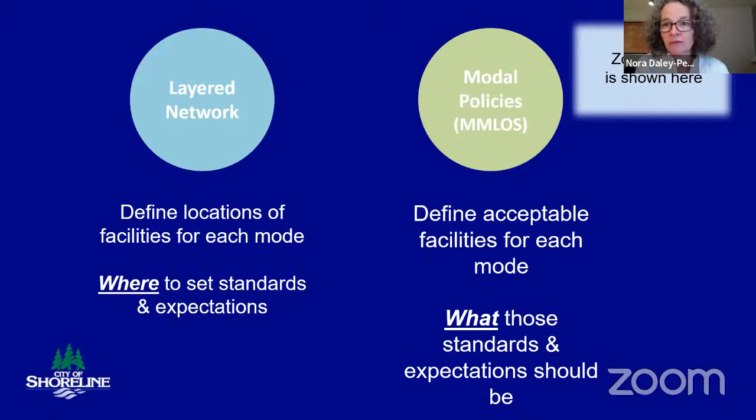Diving a little bit deeper, what are we considering for each one of those modes? For the pedestrian mode, we are really relying on the good work that was done in 2018 with the existing sidewalk prioritization plan, as well as looking at land use context and street classifications. For bikes, we are using the state of the practice, which considers providing a comfortable, low-stress environment tailored for serving people of all ages and abilities.

For transit, we are thinking about how we can coordinate—not just thinking, but we are doing the coordination—with our transit agencies to advocate for service for our community's needs, as well as stop amenities that make riding convenient and comfortable.

You'll hear me use this word shared use mobility, and I will be coming back to the commission in April to talk more about that mode, but a little bit of a teaser. Most of you might be aware of the work we did with the Evans School, because I touched on that during my November presentation to the Planning Commission. We were fortunate to hire the UW Evans School to look at a concept called mobility hubs, essentially places that can be launch pads for transportation options to complete short trips around the city, like e-bikes, e-scooters, Car2Go, etc. And finally, auto and freight. This is really the focus of tonight's discussion.

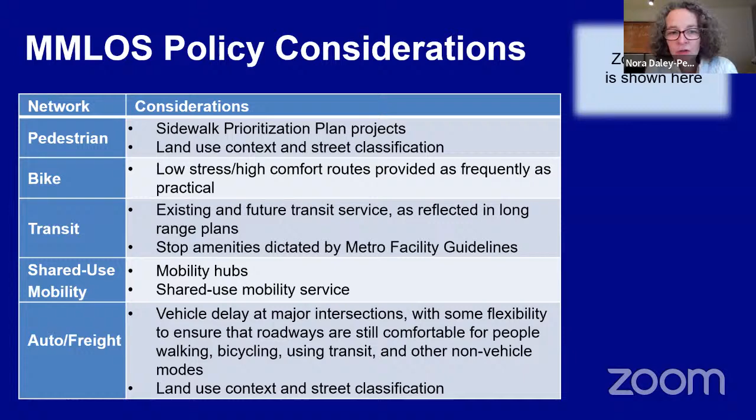The city's existing policy considers mainly delay at arterial intersections. And we're going to be discussing whether our current policies meet our needs or should they be adjusted to be more context sensitive. And with that, I am going to pass over this presentation to Kendra Dedinsky.

Kendra Dedinsky, City Traffic Engineer, and I haven't had the pleasure of meeting all of you yet, so good to be here and meet you all, at least virtually. I'm going to really dive into a lot of technical details tonight. If I accidentally use an acronym without defining it, please catch me on that, and if anything needs clarification along the way, please let me know, because this is some pretty technical and in-depth information. We'll pause at a midway point for potential questions and clarifications. But with no further ado, we will jump in now to this topic.

So what is level of service? Shoreline currently measures performance of intersections using a standard methodology known as traffic level of service. This is used by jurisdictions all over the country, and level of service represents the average delay per vehicle during the peak hour at a controlled intersection. Individual LOS grades are assigned on a letter scale A through F, with LOS A representing free flow conditions with no delay, and LOS F representing highly congested conditions with long delays. You can see the delays in the table associated with those letter grades.

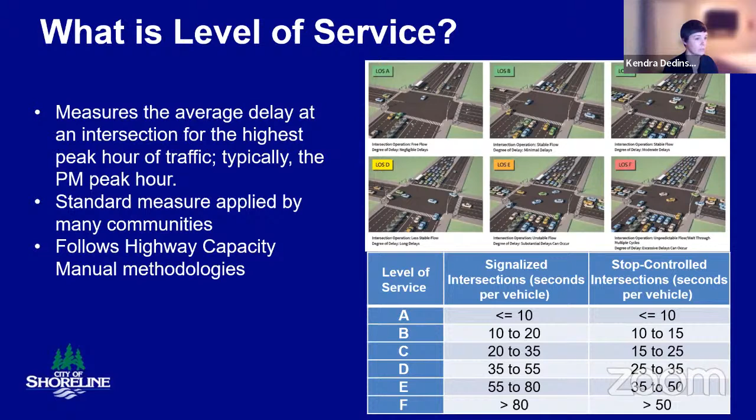So the city's current level of service policy requires level of service D at signalized intersections on arterials and at most unsignalized intersecting arterials, with the exception of state routes, which have a level of service standard of E. We talked about intersection level of service, but we're also introducing our supplemental volume to capacity standard, which simply takes the measured or anticipated volume of the roadway and divides it by the theoretical capacity. We'll get into more detail on that later. The capacity is typically established by regional models.

Can you go back to the last slide? Sorry, Nora. Let's see here.

Another concept I wanted to introduce before we jump into the host of options we're considering is growth projects and transportation impact fees. We're not going to talk a lot about that today, but I wanted to note that level of service standards directly correlate to transportation impact fees paid by development, or in some cases by the city, where we exempt development from paying them. Any location not meeting our level of service standard as we evaluate it today must be mitigated or exempted from the standard. So to mitigate, growth projects are planned, and the estimated cost of those projects is the basis for impact fees. Basically, the more projects there are, the higher the impact fee becomes. This is a fundamental principle to keep in mind as we talk through the various options and how it relates to how we grow as a city.

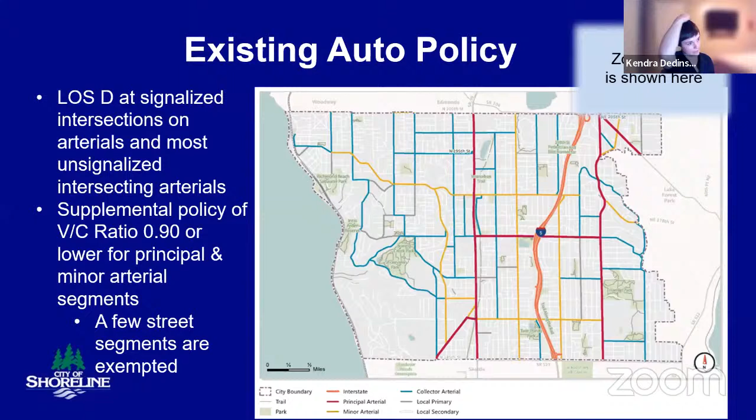Option 2A would allow for a level of service E adjacent to commercial or higher density zoning, but retains level of service D for everything else. Option 2B allows an LOS E in candidate countywide center areas, which are our 148th station area, our 185th station area, Shoreline Place, and Town Center, and that would similarly require LOS D everywhere else in all the residential areas and other miscellaneous pockets throughout the city.

The last option, option 3, which is a bit complex, so I'm happy to pause once we get there, proposes an average methodology - LOS E for intersections along particular corridors in our denser areas, and D for everywhere else. So that is averaging level of service across multiple intersections, a little bit different than the previous options we're describing, which apply to individual intersections.

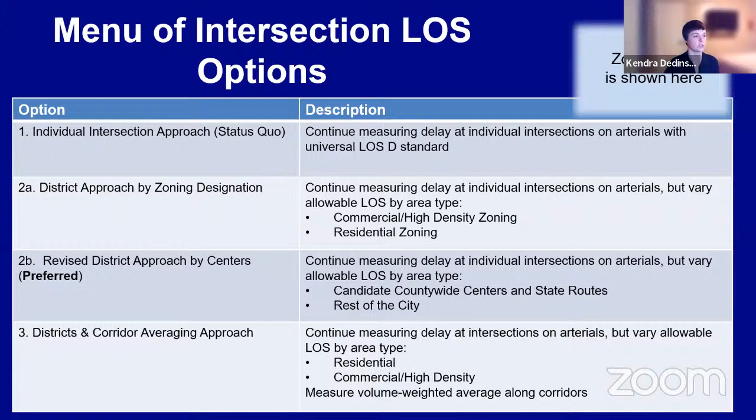Okay, so next slide. So jumping in, we're going to go through piece by piece through the four options, pros and cons, and then look at them together. This is really just evaluating a basic overview of our first option from a pro-con perspective, which is our status quo, our level of service D citywide at arterial intersections. And want to note too, keep this in mind also, that state routes are exempted from that to level of service E already.

The benefits of this option of staying the same are really its simplicity. It also upholds the least vehicle delay, so this would make sure that driving remains relatively convenient citywide. On the flip side, though, upholding this lower vehicle delay really does come at a cost, mainly to walkers and bikers, as wider roadways and intersections make for more exposed crossings and a less friendly walking and biking community, as well as just less available right of way to work with.

Another big concern with this option, and perhaps relating back to the impact fee, is this option would be the highest cost, both to the city and developers, for mitigation projects that are required to make sure the intersections function at this level of service. So the more projects required for this more conservative LOS policy, the higher the TIF ends up being. So those are the main benefits and trade-offs of staying the same.

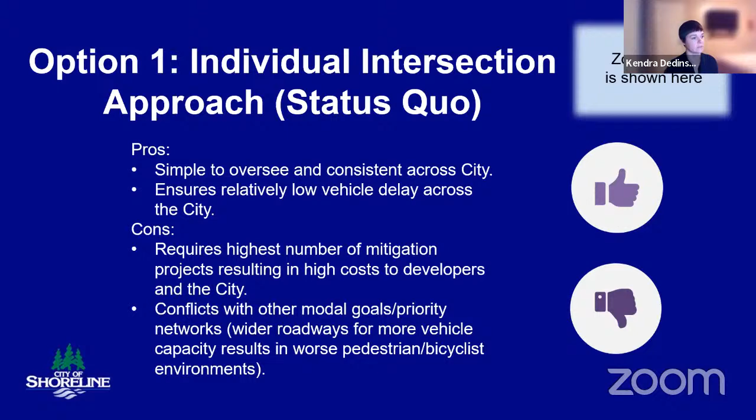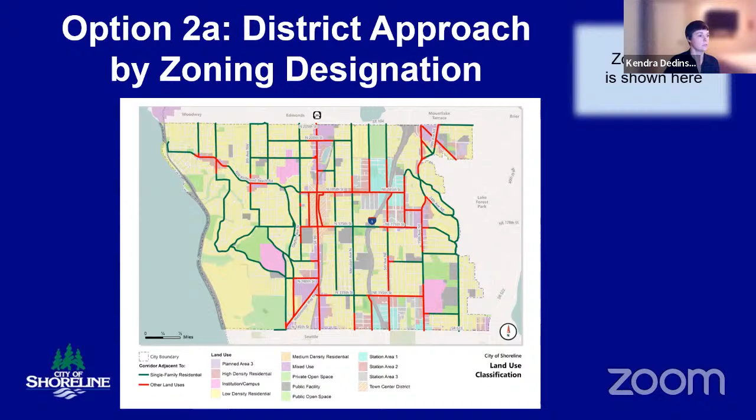Next slide. Okay, so looking at the pros and cons of this more context sensitive approach, we see it serves to better balance the modal priorities. So what I mean by that is we're not required under this option as much to expand roadways in areas where we're hoping to see more people on foot or bikes or scooters, that sort of thing. This option does still evaluate individual intersections, so it maintains simplicity in the same sense our current standard does, and notably, lower cost slightly than the status quo.

That said, with this option, you saw there's variation throughout the city. That can bring some edge issues that I'll mention on a couple other options too. What I mean by that is if we allow for a level of service E on one intersection that's adjacent to a residential area, you could expect that delay kind of trickling into that residential area too. So that's something we need to be cognizant of as we evaluate these options.

Additionally, with this option, there are little pockets of higher land use, right? Take Richmond Beach, down by the bowling alley, etc., that aren't necessarily as well supported with transportation options. They're not right next to light rail stations, maybe just one or two transit lines, not a complete sidewalk network. So it might feel more appropriate to maintain a LOSD in those fringe areas, not in our core area with more robust transportation options, as we'd expect them to remain somewhat vehicle dependent.

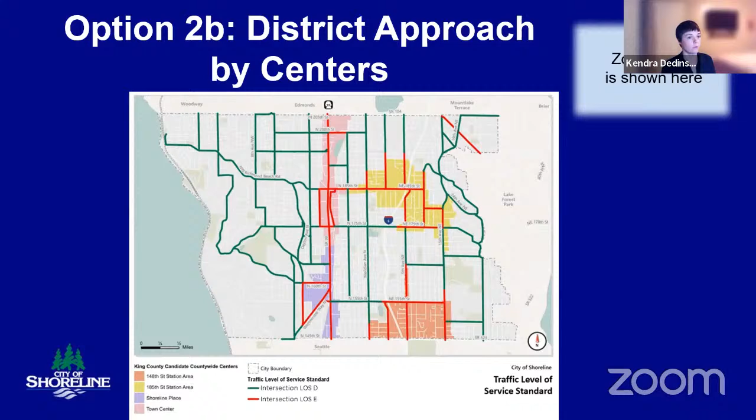All right, next slide. So this option has a lot of the same benefits as option 2A in terms of being slightly lower cost than status quo. It better balances mobility priorities with context sensitivity, and I'd argue even more context sensitivity than 2A, in that we're really focusing in on the center areas where we're expecting the most growth.

But it also better addresses some of the downsides. There are fewer edge issues, right? You'd expect fewer effects trickling out from the growth centers compared to the multiple locations that occur in the zoning designation option.

And the other thing we know is that our zoning can change. It's not something that happens frequently, but it could change over time in small areas, small pockets or parcels, which can pose a challenge for keeping the level of service standard consistent with zoning specifically. These centers are less likely to be a moving target, so anchoring our level of service to that makes sense from a consistency perspective as well.

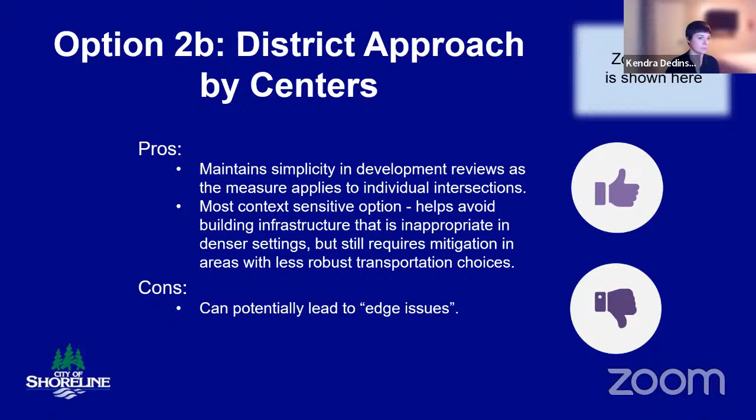All right, next slide. Getting to our last intersection option that we've evaluated: this is option 3. This really allows the greatest flexibility, and by that I mean it allows the highest amount of vehicle delay.

It groups some key corridors in our denser areas together, setting a standard of an E average. What this means is that one or two intersections along one of these grouped corridors might actually fail, have a very high level of delay, but if the weighted average of all of them taken together still produces a level of service E, then we consider it okay and don't need to mitigate at that point.

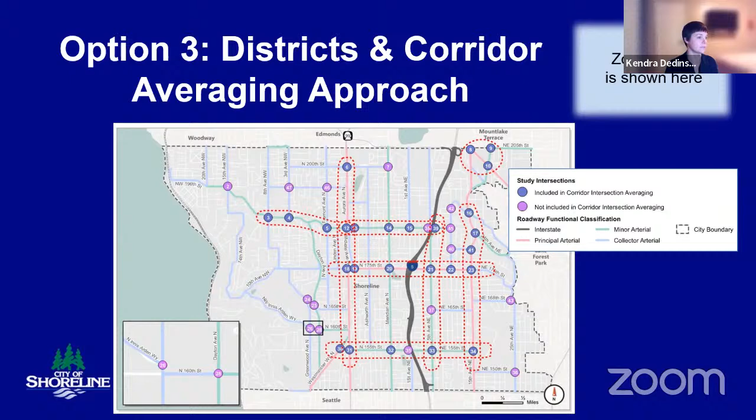So by using an average of multiple intersections, you allow for a higher level of delay. I should note that all the intersections outside of the groupings would be expected to operate at LOSD or better. So definitely a bit more complexity added with this option. As you can see, this practice is in place in other cities — Kent is one regional example where this averaging method is used.

All right, next slide. So again, most flexibility in terms of allowing the highest levels of delay. What that means is it requires the least amount of cost associated with making vehicle capacity improvements, which could free up capital to focus on more pedestrian and bike centered improvements as we move through our multimodal level of service standard.

It also, in a way, matches the driver experience — as you take a trip, you're traveling through multiple intersections, so some added delay at one or two intersections is acceptable, so long as the trip as a whole functions at a certain level. But on the downside, this option is significantly more complex for developers to analyze and for the city to review and oversee.

And obviously the downside is it allows for higher auto delays, which I think we've heard from our community is a concern to some degree. This particular option 3 certainly has the edge issues as described earlier, and to some degree a perception of arbitrariness in how we're choosing to group those intersections together. We need to be very careful that we got the corridor groupings right.

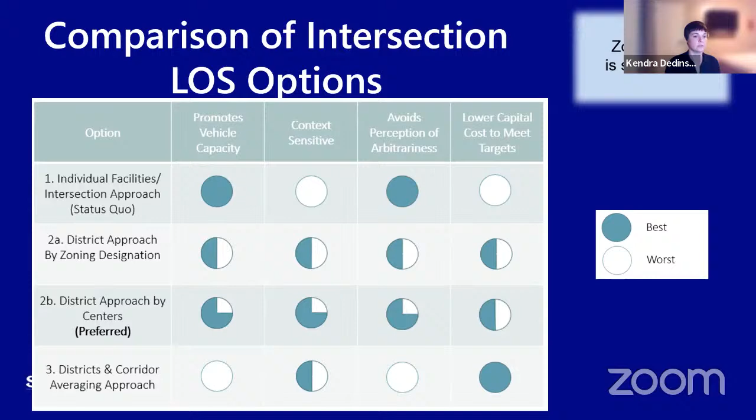And option 3, while it perhaps better promotes or frees up some capital for walkability and bikeability in theory, in terms of considering our overall capital costs of what we expect these growth projects to look like, it could be perceived as a poor fit for some areas of the city that lack robust transportation options. People out on the outskirts that are not in those centers specifically will likely still rely on some vehicle modes. So we thought in reviewing these four options that 2B seemed to fit the bill the best.

All right, I can pause here if there's any questions so far, but there are more slides to go through in terms of the modeling, analysis and findings, as well as the VC. So if there's any clarifying questions about the intersection approaches, I can answer those now. Otherwise the discussion component will be at the very end. I'm not seeing any hands up. Oh, there's one, go right ahead.

Yeah, when you're talking about the localized approaches, are you talking about the impact on intersections in those areas, or trips generated from those areas? Is your question what I'm talking about with the edge issues, or... I guess I'm not entirely following. I'm sorry. So a hypothetical project, let's say there's a proposed project outside of one of the countywide centers, but it has traffic impact within the center. Are we looking at the impact to intersections in those, or projects within those centers?

Yeah, both. So the basis of impact fees is that we put together this projected modeling, and we see a number of intersections that we're expecting to fail and need improvement. This is true for other modes as well, and we'll get there eventually. But that forms basically a list of needs that we need to fund over the years. So we come up as transportation planners and engineers with a list of projects and some estimates for those projects. And then it's basically divvied out as a growth share, as a per-trip fee. So a developer in any part of the city pays a per-trip fee to mitigate failures within the centers, outside of the centers, wherever they may occur.

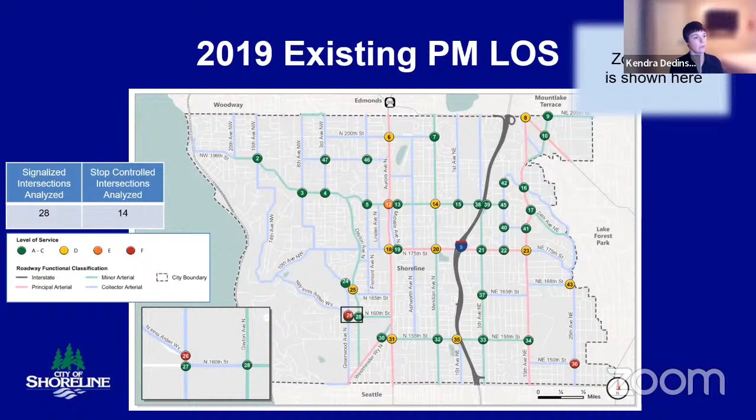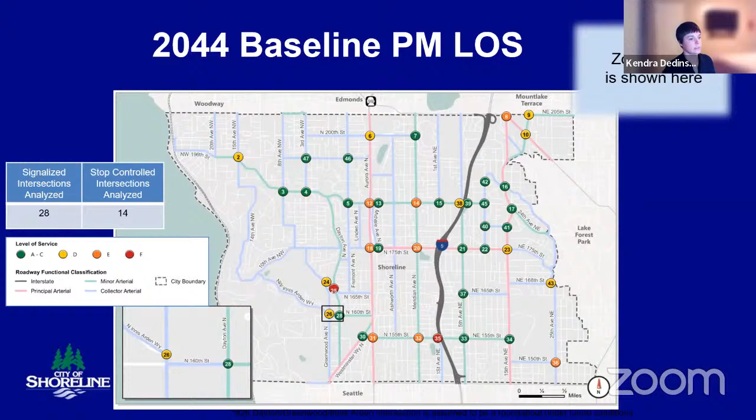All right, next slide. And so what this boils down to for the various options that we discussed previously, really focus on the right column, it's probably the most important one. It's split out by signals and stop-controlled intersections, but the right one is really just showing the total need.

So basically what this is showing here is the summary of how many intersections would fail according to that standard. You can see 6 fail with our status quo, 5 under the 2 district approaches, and 3 with the last corridor averaging approach, which is mainly related to things outside of the grouped corridors still having to meet that D standard. You can see it's not really an order of magnitude difference, but overall we're still going to have a few intersections that need mitigation regardless of which option we choose.

I also want to note that we're not analyzing every single intersection. If a large project were to come in outside of the areas we've anticipated, we would be analyzing that and holding it to whatever standard we choose here. The district approach would be more conservative for anything that pops up in a place we didn't necessarily expect, if that makes sense.

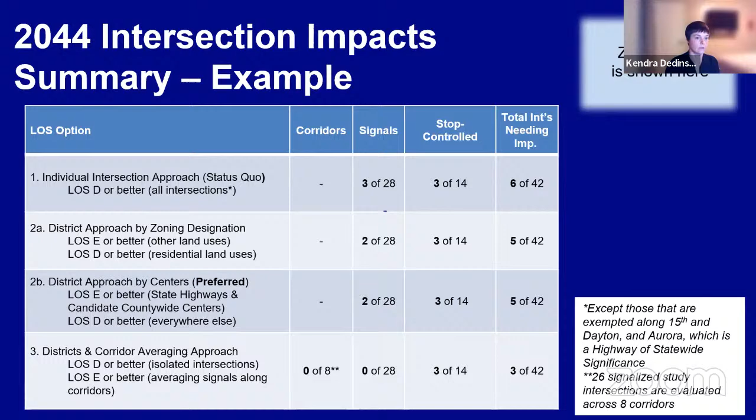Okay, so with that summary of our modeling results and impacts based on the various options, I'm now going to jump topics to our supplemental. This is a level of service standard supplementing the intersection level of service standard called V/C ratio, volume to capacity ratio. As shown here, the calculation is basically an add-on to what we have right now, and this is an existing thing we have in place. So we'll be discussing options for this as well, the supplemental.

As you can see here, the calculation is relatively—oh, I'm sorry Vice Chair, you had your hand up, did you have a question? Yes, thank you, I had a real quick question.

Did you, when you changed the prioritization and degraded the LOS from D to E, also do a study to see what benefits or what lead time the pedestrian crossing would be at those intersections if you did that?

That's an incredibly intuitive observation. There are not any great high-level modeling tools to do that work in the engineering industry. You've hit on something near and dear to my heart, because you're probably making the jump to the correlation that if you widen intersections and increase signal cycle lengths, people are waiting on those corners longer. It takes longer on foot to walk places. So there is a trade-off to pedestrian and bicyclist travel time, not just experience or safety, but actually how long it takes them to get around when you start widening intersections. That is a very good correlation if that's the one you were jumping to.

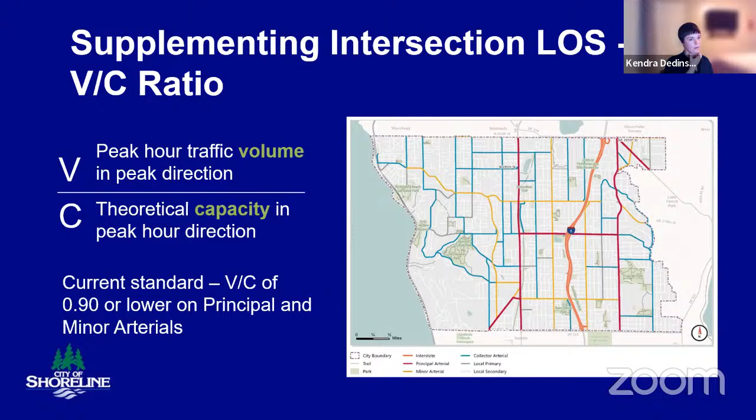Looking at the options we came up with for this supplemental standard: option 1 keeps things the same, a no-change option applying 0.9 or lower to principal and minor arterials. Option 2 removes the standard altogether. Option 3 syncs it up with our preferred intersection method, the level of service allowable increased delay in centers. What we'd propose is a V/C ratio of 1.1 or lower in the candidate countywide centers, retaining 0.9 for everything else, so status quo elsewhere.

All right, next slide. So, status quo.

The pros of maintaining the supplemental measure is that it provides another check against the intersection level of service standard, a non-intersection based metric for us to evaluate projects against. On the con side, it's a rather simplistic tool and not a standard one. This isn't a measure you'll find in an engineering manual, which makes it somewhat complex for development review and oversight, since it's kind of a niche or unique standard.

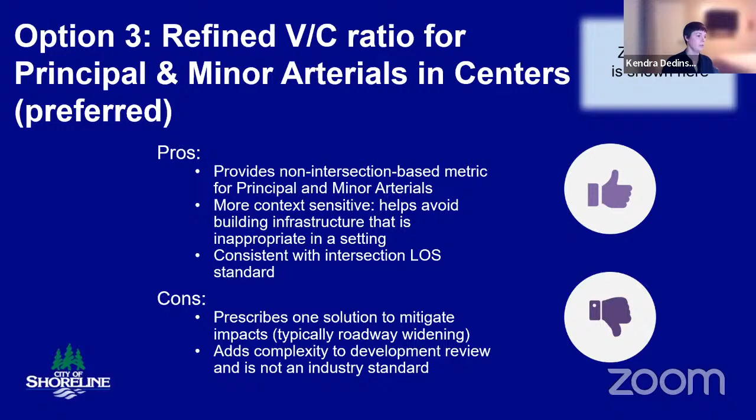Wrapping that into a table, just like the other version did. For the existing standard, we see 9 corridors, and some of those are quite long, that would fail the 0.9 standard potentially into 2044. Removing it, obviously, isn't really applicable—we wouldn't measure it. And number 3, the one that's consistent with our countywide centers, allowing a 1.1, we end up cutting the number by more than half of mitigation projects. That becomes a little bit more manageable, more context sensitive.

With that, I'm going to sum up the technical side of the presentation. Bringing you back to where staff and the consultant have landed, which is that the district approach seems to be the best balance of competing needs in the city. It's still maintaining a fairly good level of delay, especially on the outer edges of our city that are more auto dependent, but it is providing a layer of context sensitivity that is absent today. So this puts areas in the centers at a level of service E or 1.1 for segments, and everywhere else maintains the same standard we have today.

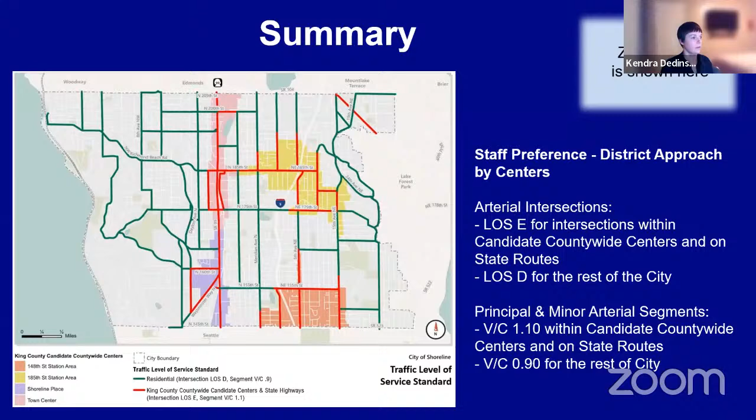That's all I've got. I think, Nora, you had a couple of reminders just about next steps.

Thank you so much. I'll wrap up next steps, then pass it over to the Planning Commission for discussion. Just giving you an idea of what we're doing and when we'll return to the Planning Commission. Over the winter, we've been working on developing draft modal plans for pedestrian, bicycle, transit, shared use mobility, and freight and auto modes. We'll return to the Planning Commission on March 17th to share the TMP's process for prioritizing projects, as well as performance measures—how we can track progress and show how we're achieving the goals of the TMP. We'll debut the draft modal plans with you in early April, as well as share an overview of the activities and events planned for Outreach Series 3. As I mentioned up front, we're planning to launch Outreach Series 3 in about mid-April.

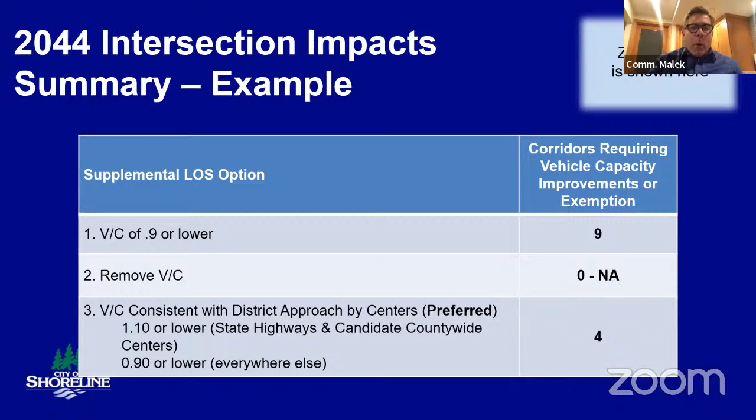If we could go back to the slides, I think it was the third to last slide, and it had the map on it where you were showing V over C as 1.1 versus 0.9 and how that would mitigate some of the issues. Just curious about that little red line between 8th and 3rd. Why that side of the street and not the other? Is it commercial? Same thing over here on Aurora and then again on 15th.

You'll notice something very intuitive once I describe it. It's because it's measuring the peak direction, which is northbound during the PM, or in the case of Richmond Beach Road, westbound during the PM. Whenever we look at level of service standards, we're only measuring the worst case scenario during the day, the highest hour during a 24-hour period, which is almost always the PM peak. So any mitigation related to failure is most of the time going to correlate to that PM peak direction. Primarily you end up impacting both, especially with intersection mitigation, but it's looking at that PM peak direction. So on Richmond Beach Road, most people are headed home in the evening, so you're going to see it in the westbound direction.

Does that make sense? Kind of. I think what you're saying is it's the way you're measuring it, what the V/C measures and what the intersection level of service measures. So when we look at each direction separately, we measure the V/C for each direction. What we do is plug in the hourly traffic count for, say, 5 to 6 p.m. on Richmond Beach Road westbound, and divide it by the theoretical capacity of that direction, which gives you your V/C. In the eastbound direction, volumes are lower, so you end up with a lower V/C, because there aren't as many cars traveling eastbound headed out of the community.

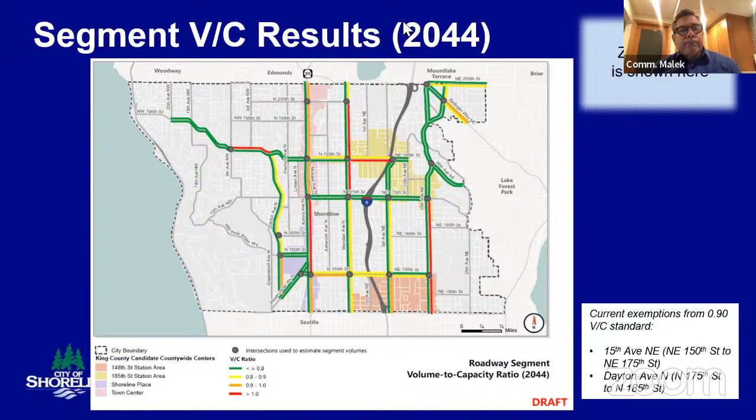WashDOT has adopted a threshold standard of 0.9 VC for their rights of way. If in Shoreline, do they enforce that threshold on the WashDOT jurisdictions in the city, or because of the size, are we too big for them to do that?

Yeah, it's a bit of murky territory, I would say, but if I can give you a clear answer, it would be no, they don't enforce it on our state highways, I wouldn't say. In cities of a certain size, and we're a city over a population to the point where we maintain kind of our own city standards for the state highways, as well as all of the stuff on the state highway, with a few exceptions. So generally speaking, cities do have a fair amount of control over kind of how they want their state highways through their cities to operate. We do still, of course, work under the constraints of WashDOT and work with them, coordinate and partner to the degree necessary. But yeah, I would not be concerned particularly about that standard.

The other thing is the way that WashDOT applies it is, I think, slightly different than what we're talking about here. The VC standard is actually an engineering standard as it applies to intersection approaches, and it has a whole series of calculations with the highway capacity manual associated with it. I suspect that is the way that the state applies it, and I think we would still meet the standard in this case, regardless. So, good question.